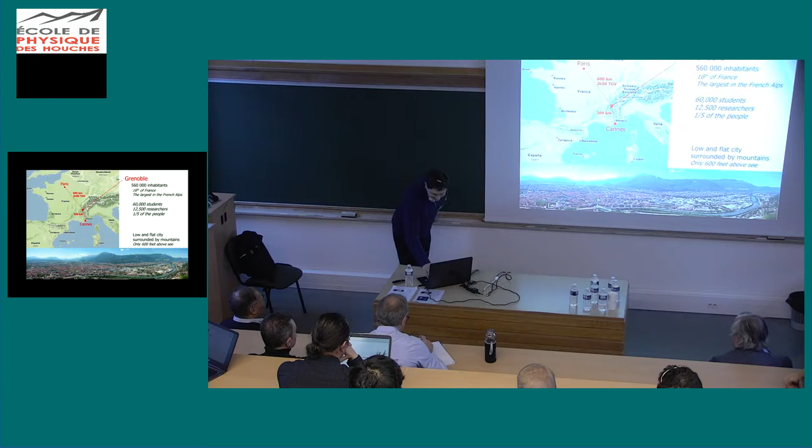Also, Grenoble is known as the flattest city in France. That's a bit strange, but the city was completely flattened by the glacier that surrounded the city 10,000 years ago. The weather is not so cold because it is only 600 feet above the sea, so it's quite pleasant to live. And Grenoble is known for winter sports, hiking, but also for several very big facilities like the synchrotron and ILL, Institut Laue-Langevin.

So I am working in the 3SR lab, the Soil Solid Structure and Risk laboratory, and we belong to the Risk and Vulnerability Division. One of its aims is to investigate the behavior of materials and structures under extreme loading conditions. Among our facilities you can find the GigaPress, a very big triaxial test press for concrete. You can perform experiments on 70 millimeter diameter concrete samples up to 1 gigapascal hydrostatic pressure. The capacity of the press, if I remember, is 13 meganewton.

But also we can perform dynamic experiments, Hopkinson bar experiments for spalling, for shearing. We are also developing experiments at the structural scale on the DESIS platform. You can see here a beam that was supporting a very huge weight. In this test, we simulate the loss of the bearing capacity of the central column. That's why it is completely bent; this is the final state of the beam. The lower support was released in a few hundreds of milliseconds, so we were able to simulate this loss of bearing capacity, and we record the process with ultra-high-speed imaging, etc.

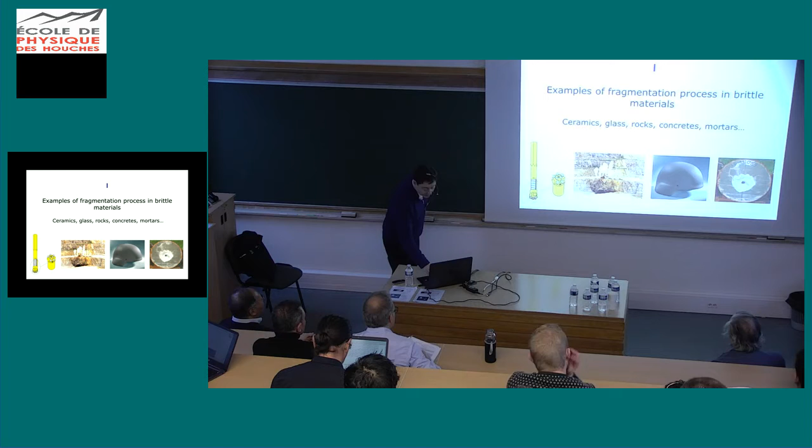So, a few examples. We have already mentioned these examples, so I will be fast in this part. If you have any questions during the discussion, you are welcome. So I have already mentioned the intense fragmentation process that can occur during impact experiments.

And this is very important to understand the behavior and the ballistic performances of material like ceramics used in helmets, vehicle protections or body armor.

But I want to stress that fragmentation process is not only observed under impact loading, it can be observed in a quasi-static test. And for instance, this is a uniaxial compression test performed more than 10 years ago. It was my master project, so it was quite a long time ago. And you can see the very nice experiment we performed with Christophe Denoual.

So it consists in compressing in quasi-static, so the loading is a few minutes long, a sample that is a Diabolo sample, as you can see. And we can reach up to 6 gigapascal of axial stress in this part of the sample, the ligament of the sample. But what happened in a few microseconds, it is a brittle failure.

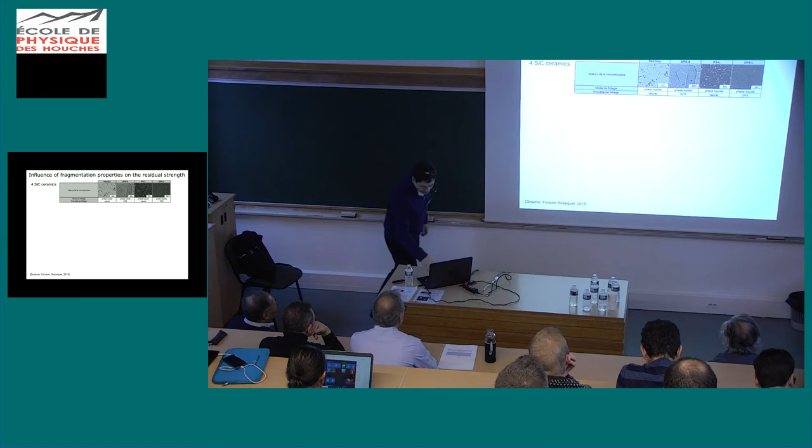So why should we investigate fragmentation? Maybe we could say, okay, the ceramic fragments and we don't care how it fragments. But in fact, it is important, and this is, I think, the configuration that can explain that to you. In this configuration that was presented by Marielle yesterday,

ceramic that was sandwiched between a front steel plate and aluminum backing was first impacted with a cylindrical projectile, so we generate an intense fragmentation process you can see here. And after, it was re-impacted with a conical projectile, as you can see.

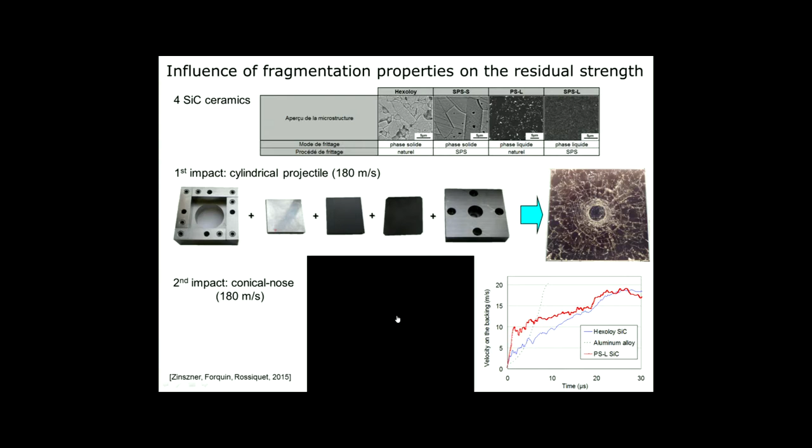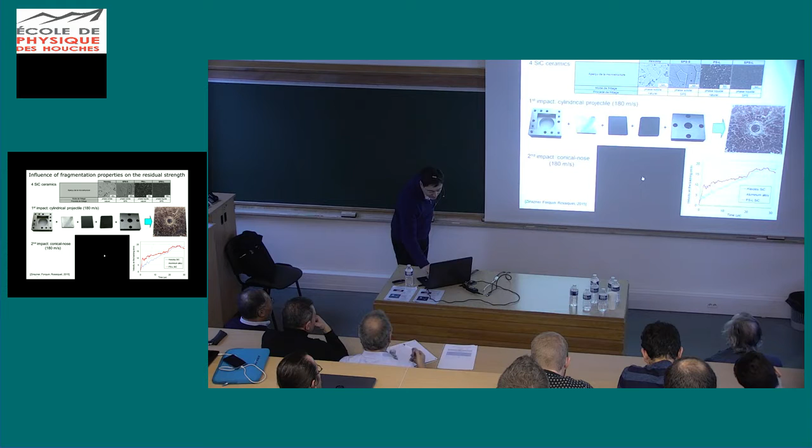And what was observed since the Zinszner PhD work was that the velocity profile was strongly different depending on the fragment size in the ceramic target. So there is a relationship between fragment size and the penetration resistance of the fragmented medium. That's why we need to analyze and better understand the fragmentation properties of this kind of material.

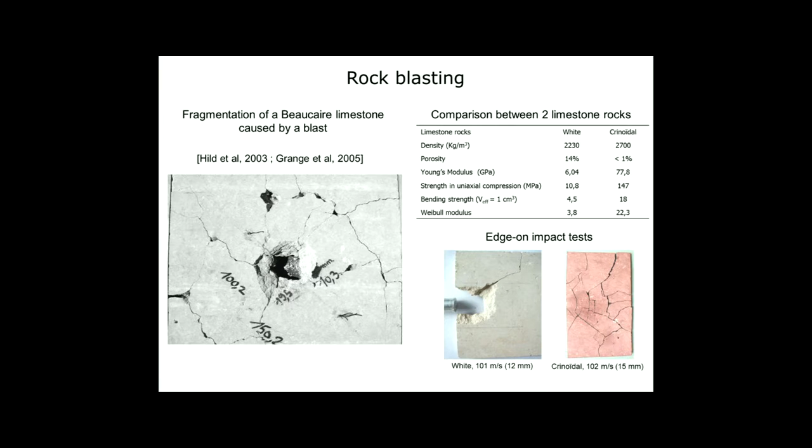Okay, other examples, but I will be fast. Rock blasting. In this example, what was interesting is that the people from a company called Nitrochimie, a French company, were not able to fragment a weak rock. When I say weak rock, this is a white rock with quite low strength in compression, only 10 megapascals, and with quite low bending strength, about 4.5 megapascals. Whereas they were much more confident fragmenting a very hard rock like a crinoidal rock.

And the explanation was given from these edge-on impact experiments. So you can see, in fact, it was demonstrated that in the weak rock, the compression damage completely absorbs the kinetic energy. And that's why it was so difficult to generate new cracks in the rest of the volume. Whereas in the crinoidal rock, it was much easier to let the cracks propagate.

Okay, I hope it's not too heavy.

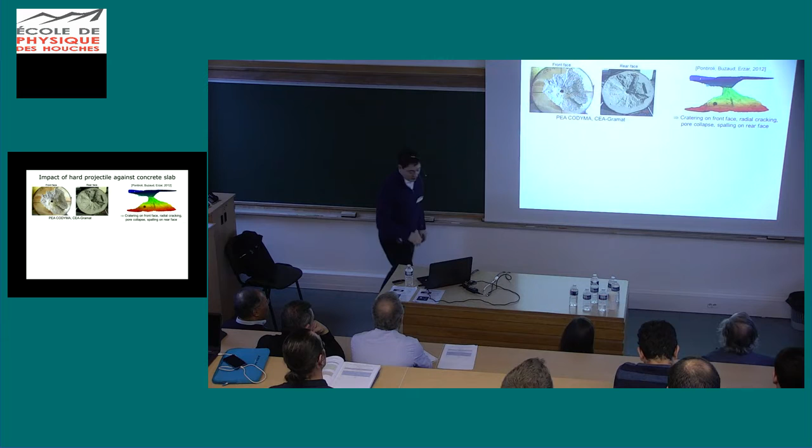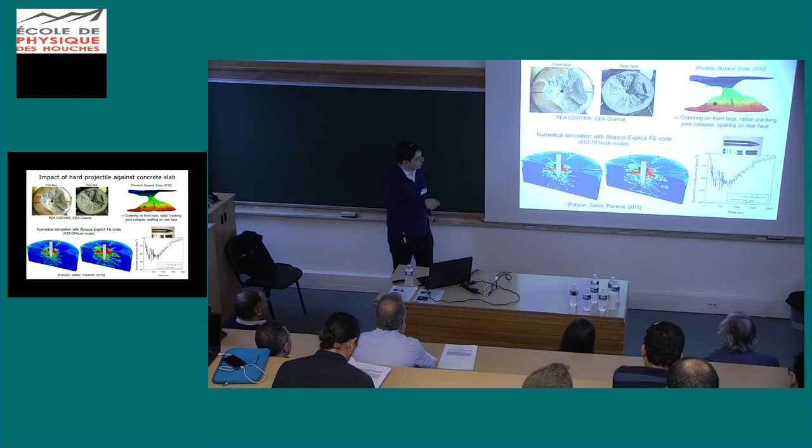Okay, it's okay. Of course, another example could be the ballistic impact, the impact of a kinetic penetrator against concrete targets. And again, we can observe a large amount of fracture, of tensile damage that has to be taken into account in a numerical simulation. Okay, this is also another example.

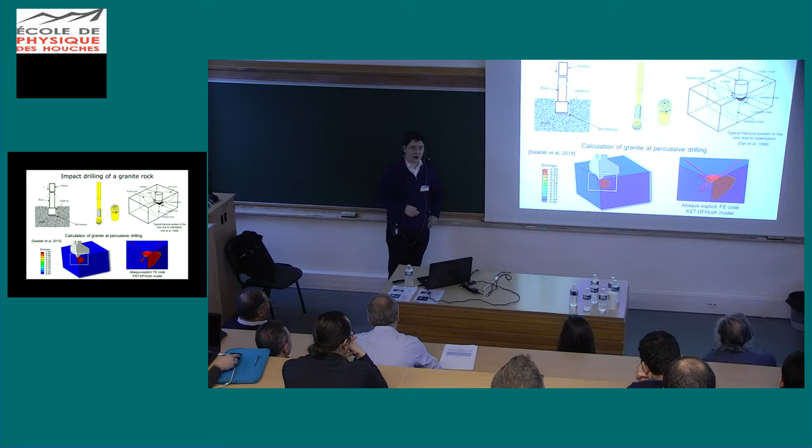And in fact, to optimize this process, we have to optimize the size of defects, the size of fragments, because all the fragments should be evacuated on the lateral part of the tool. So it's very important to have no too-large fragments, but not too-small fragments either. So that's why fragmentation properties are also very important in such applications.

Okay, so now a few experimental results to show you the influence of strain rate on the fragmentation of these materials. So how to perform a quasi-static test? In fact, the simplest way to perform a quasi-static test is to do a bending test. All of you know this kind of test. These tests were performed in the present case on ultra-high strength concrete.

And what is interesting is to see that the failure load or the failure stress is random. And it is not random due to the change of sample dimension. It is random due to defects. You can see, for instance, the B5 sample, where the tensile surface was here at the top, and you can see the large pore near the tensile surface, whereas in B1, a much smaller pore triggered the failure. So there is an obvious correlation between the size of critical defects and the corresponding failure stress.

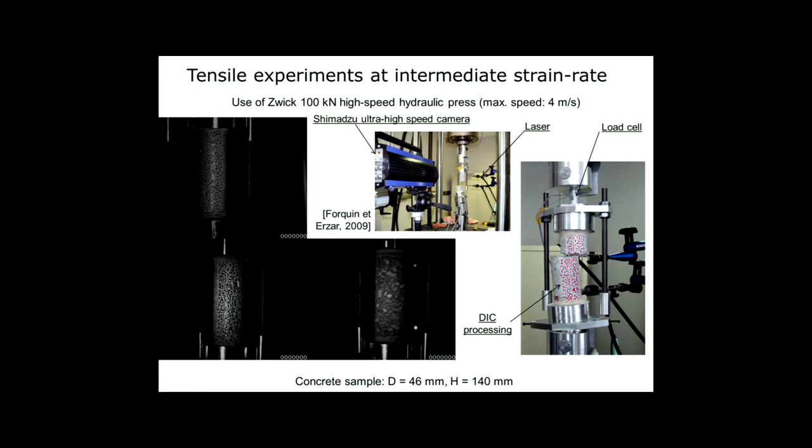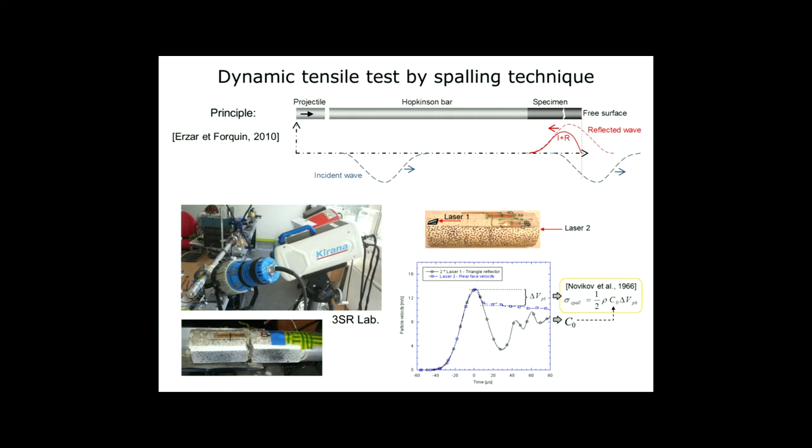But we can also perform direct tensile tests. It's less convenient because you have to glue the sample, so you can have a triggering of fracture near the sample ends. But okay, I will be fast. Another way to do it is, of course, to use the spalling technique, but this is now a dynamic test. This test was already commented on. I would just say that the typical strain rate that can be obtained is from 20 to 200 s⁻¹. And you can use nice instrumentation with an ultra-high-speed camera to perform a full-field measurement.

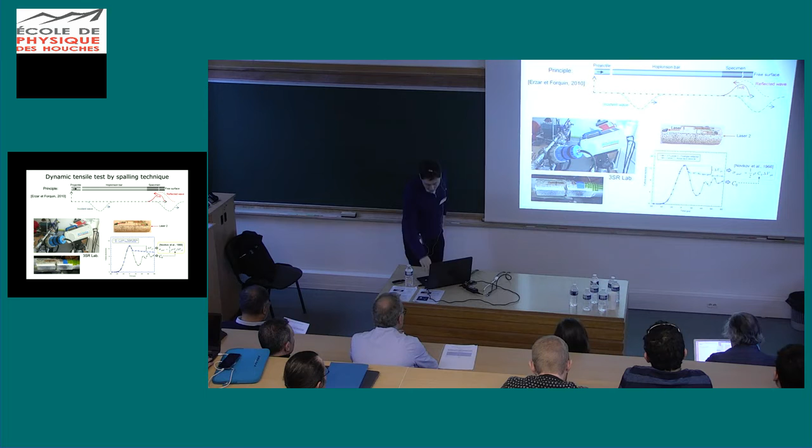And Dominic and I are working on this kind of test to derive displacement fields, and from the displacement field we are able to get the acceleration field in the sample. So we are able to recalculate the exact level of stress in any cross-section visualized with the ultra-speed camera. And that's a method to measure the tensile strength or the spall strength. Or another method, of course, is to use the classical Novikov formula that relies on the use of an interferometer.

Okay, but what is important here are the results. And the results show that in quasi-static, the failure stress is about 4 megapascal. At intermediate strain rate above 1 second minus 1, we have just a little increase of strength, from 4 to 5, 6 megapascal. Whereas above a certain strain rate, we have a sharp increase of strength.

And what was also very interesting to see is the influence of humidity. So, for instance, you can see here a wet concrete, the blue diamond. The green triangle corresponds to wet microconcrete. So the same strength is observed, so there is no big influence of aggregate size, it seems. Whereas a much lower strength can be observed with dry concrete or dry microconcrete. Okay, so this is an important point.

And the second important point is the amount of cracks that now is observed. You can see in this microconcrete loaded at 130 second minus 1 the numerous cracks that were supposedly triggered on defects, on pores, and propagate dynamically in the whole sample.

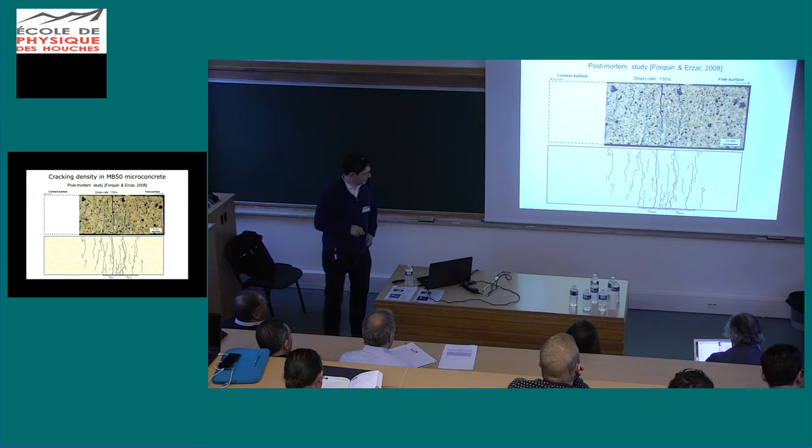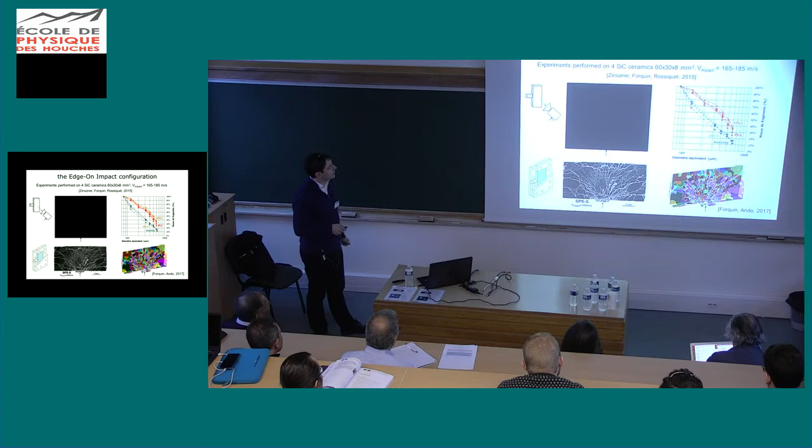And what is important is to observe that, first, the fragmentation process is a deterministic process. That is, two samples of the same ceramic grade will lead to the same fragment size distribution. It's, I think, very clear here. But when you compare different ceramic grades, you can observe different fragment size distributions. So there is a strong influence of ceramic microstructure on the fragmentation process and fragment size distribution.

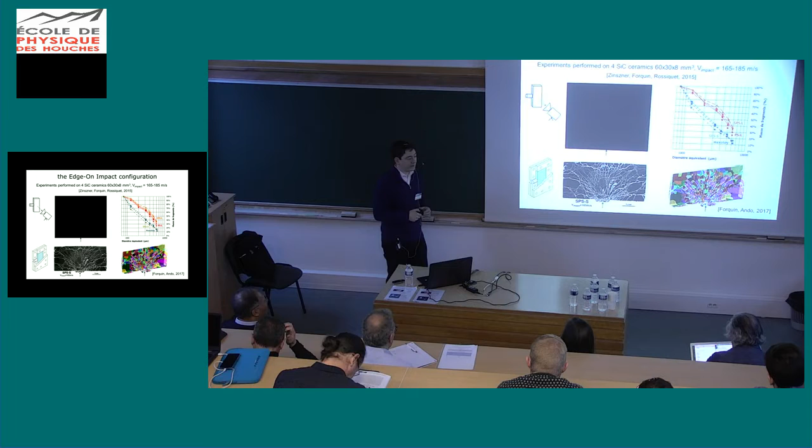And to analyze this fragmentation process, we can perform edge-on-impact experiments in what we call the sarcophagus configuration. As you can see here, it's a post-test view of damage, and we can also analyze with X-ray tomography all the fragment distribution in the target. So we can correlate the applied strain rate at different locations with the fragment size. That is also very interesting.

Okay, but we are not measuring any strength with the edge-on-impact experiment. So how to measure strength? I could say one of the most beautiful ways to do it at high strain rate is to use the GEPI testing facility available at CEA, the French Atomic Agency, in Gramat. I have already commented on this kind of test, but I just want to say that with these experiments you can apply strain rates in the range from a few thousand second minus 1 to a few tens of thousand second minus 1.

And what was observed by Erzar and Buzaud was that, first, the strength seems to be equal to the quasi-static strength of the ceramic, that is well known. But above a certain strain rate, we have a sharp increase of strength. And so we have a transition between, let's say, a non-dependent strain rate regime and a highly dependent strain rate regime.

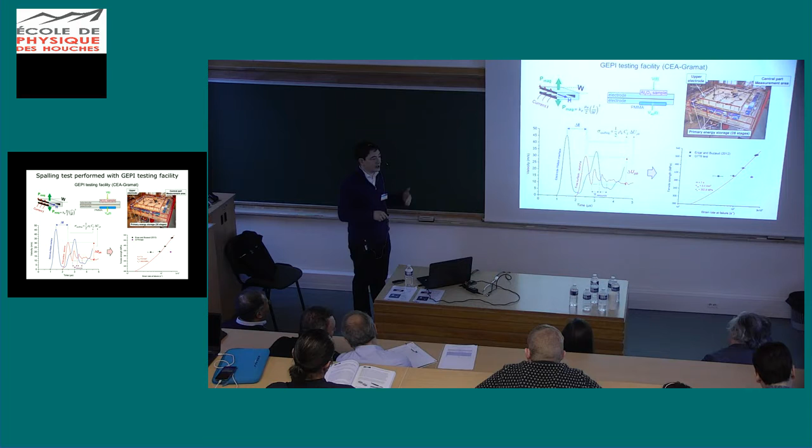Also, what was interesting to observe is that this point corresponds to a test performed with a compression stress above what we call the Hugoniot elastic limit, so the elastic limit in uniaxial strain of the material. So you can observe that now the strength is much lower. So there is a possible coupling between compression damage and tensile damage. So it's important to prevent compression damage if you want to characterize the tensile damage of the virgin material. Okay, this is just a remark.

So to conclude this part, several techniques can be used for quasi-static experiments, like direct tensile test, bending, Brazilian test, etc. The main result is that failure stresses are random. Single fragmentation occurs in quasi-static, a size effect is observed, and we can also observe with brittle materials that the fracture energy is low.

Under dynamic experiments, Hopkinson bar can be used in this range, and other techniques are needed above 1000 s⁻¹. Edge-on impact tests can also be performed to visualize damage.

And finally, we observe multiple fragmentation, high density of cracking, strong increase of strength with strain rate, and a strong influence of free water in concrete, or maybe also in rocks, because rocks could also be saturated with water. Short time to damage, according to the ultra-high-speed imaging, and a deterministic distribution of fragments is observed, with a strong influence of material microstructure.

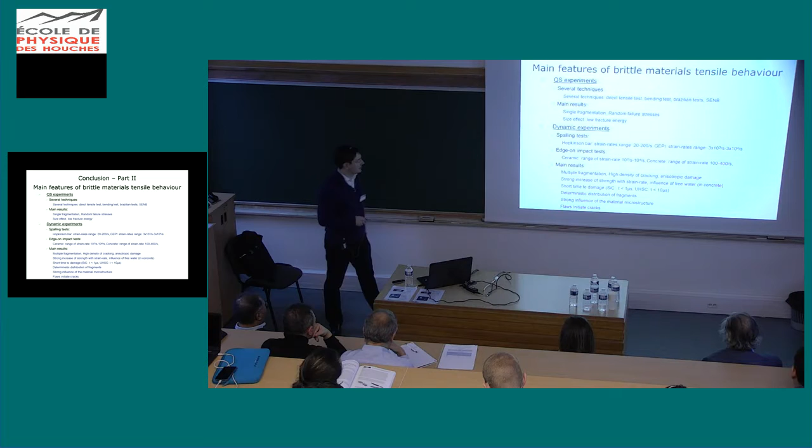So is there any common point between quasi-static and dynamic fragmentation? Yes, the only common point would be the flaws, because we can suppose that cracks are all initiated on flaws, and maybe on the same flaw population, but we will talk about that later.

Okay, so now let's go to the modeling part. So how to model a single fragmentation process? I recommend, for instance, the Weibull model. So I will remind you of the basis of a Weibull model. Imagine you perform a series of bending experiments applied to a brittle material like silicon carbide ceramic.

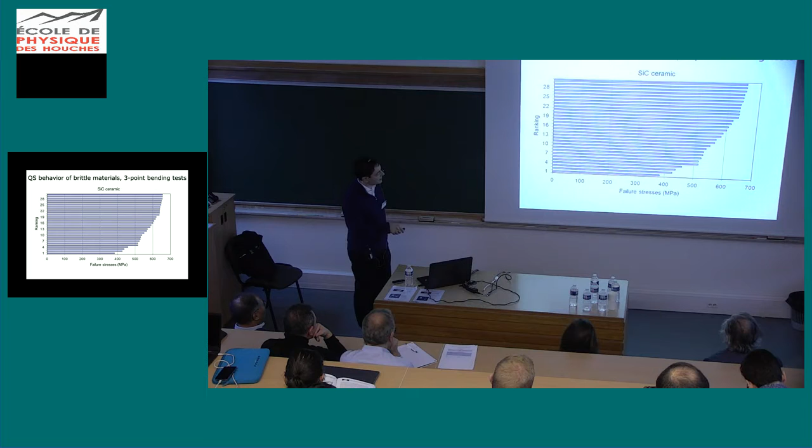So what we will observe is random failure stresses, and you can see the failure stresses obtained with these ceramics, ranging from about 400 megapascals to more than 650 megapascals. So you can fit a law that is called the Weibull law, which was published by Weibull in 1939.

And as you can see, this function fits this failure probability, this stress distribution, very well, and it is 1 minus exponential of minus the applied stress sigma over sigma 0, which is just a constant, to the power m. And m corresponds to the Weibull modulus, and the Weibull modulus means the scatter in the failure stresses.

For instance, if you consider a high Weibull modulus, you will have a curve that goes up very fast, whereas if you consider a low Weibull modulus, the failure stresses are spread out over a large range of stresses. So m means scatter in the failure stresses: the higher the m, the lower the scatter; the lower the m, the higher the scatter of failure stresses.

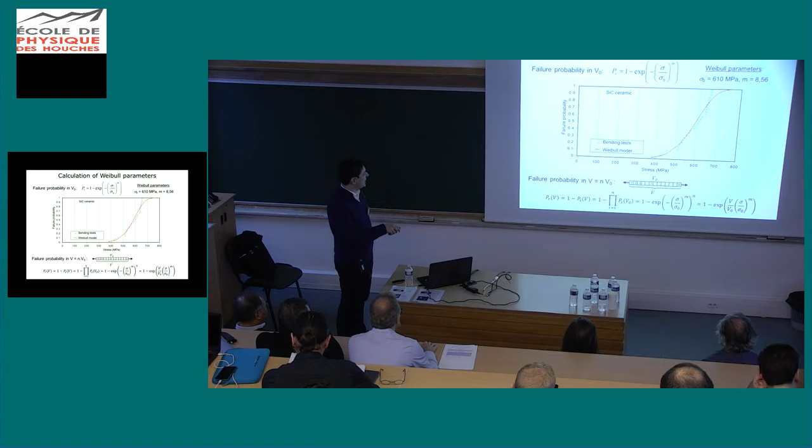Okay, this is very simple at the beginning, but it is valid for one volume. If you change the volume, we would like to know if the probability law is the same. Of course, it is not. Why? Let's consider a volume that is n times bigger than V0. So what would be the failure probability? The failure probability would be 1 minus the probability of survival.

And in fact, the probability of survival of a chain, as you probably know, is the product of the survival probability of each link that composes the chain. If only one link is broken, the whole chain is broken. So it's the product of the survival probability of each of these elements. And that's why if you use this probability of survival, which is exponential of minus sigma over sigma 0 to the power m, as you make the product of the same thing, it is to the power n.

But as you know, the exponential to the power n is the exponential of the sum. If you do exponential of a times exponential of b, it's equal to exponential of a plus b. So in fact, the n goes inside this part of the equation, and what is n? It is V over V0. So now you can get the failure probability of the volume V, knowing the failure probability and the failure parameters of the volume V0.

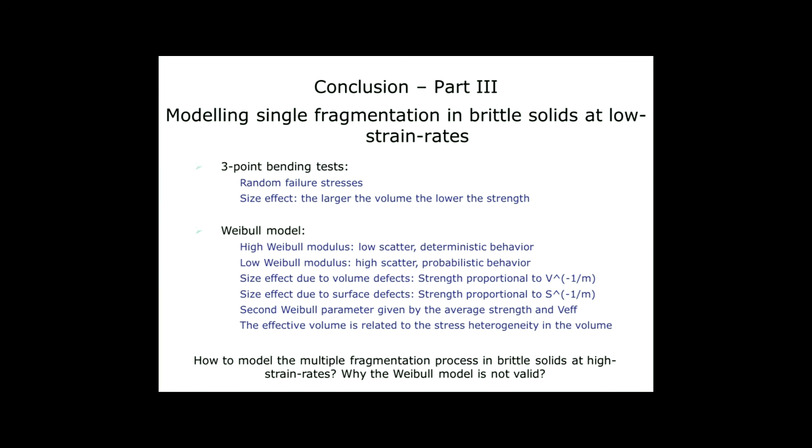Yes. So you can see that according to bending tests, failure stresses are random. Size effect is expected in quasi-static. The Weibull modulus indicates the scatter in the results. With a high Weibull modulus, you should have a deterministic behavior. Also, the predicted size effect is the following: it should be proportional to the volume to the power minus 1 over m. So it's a prediction of the model that is very interesting because m was provided by one set of experiments.

In case of surface defects, the Weibull model predicts a strength proportional to the surface to the power minus 1 over m. A second Weibull parameter is provided from the average strength and the effective volume that depends on the Weibull modulus that is known.

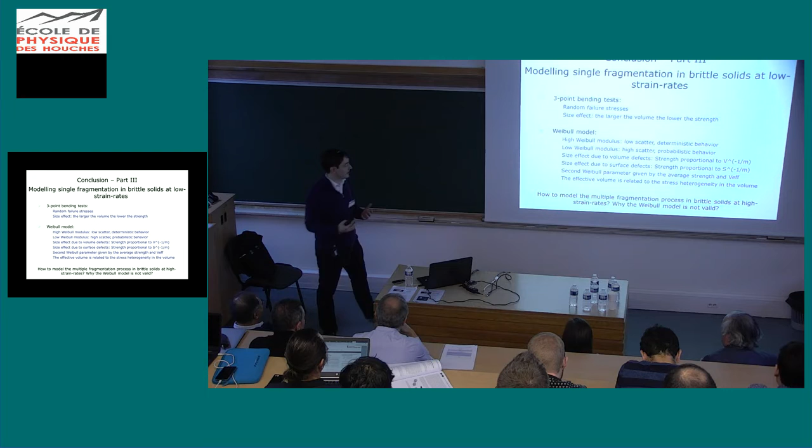Okay, so now why is this nice theory not valid at high strain rate? That's a question, and above which strain rate. So that's what I want to explain to you. So the modeling of the multiple fragmentation process. Let's consider a ring like that, and let's apply a radial velocity on the internal surface of this ring. So you can understand that the strain rate is constant if we consider a constant applied velocity, and it's about V0 over the radius.

Okay, so to simulate a fragmentation process, we need a failure criterion. So let's consider a Weibull distribution of failure stresses in each element that composes this ring. You can see all these colors and the corresponding failure stress in these elements. When the failure stress is reached, the element is broken immediately. And what can be observed is at low strain rate, 10 second minus 1, a single fragmentation process occurs. n equal 1, or sometimes we have two failures, but it is at 10 second minus 1.

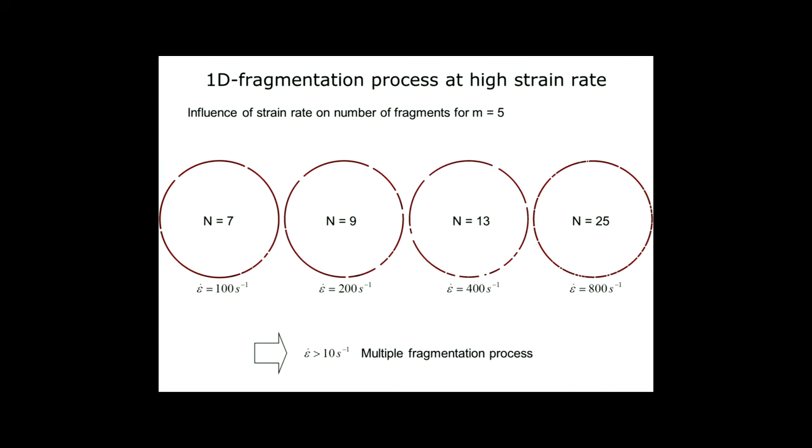Let's increase the level of initial velocity, so the level of strain rate in the ring. At 100 second minus 1, now you have 7 fragments. At 200 second minus 1, 9 fragments, etc. At 800 second minus 1, you have 25 fragments. So you have an increase of the number of fragments with the strain rate, contrary to quasi-static loading. So why do we have multiple fragmentation above 10 second minus 1?

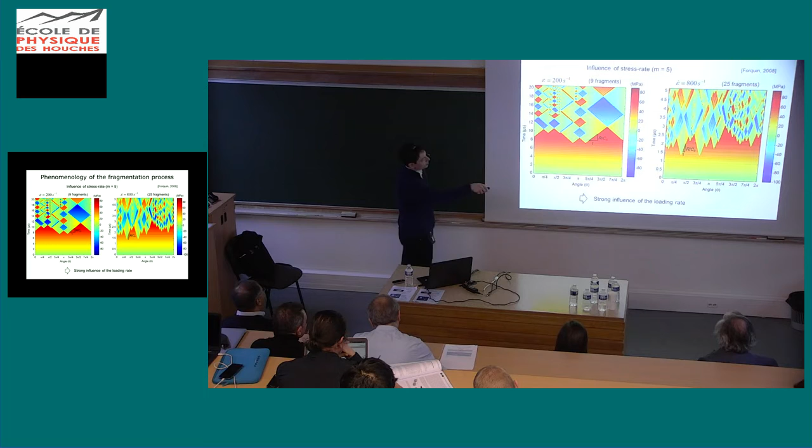If you close the cones, of course, you will obscure less. If you obscure less, you will have more fragments, more critical defects activated. At the inverse, if you open the cones at low strain rate, what does it mean? It means that you will obscure more, so you will prevent much more initiation of critical defects. And this explains the influence of strain rate on the fragmentation process.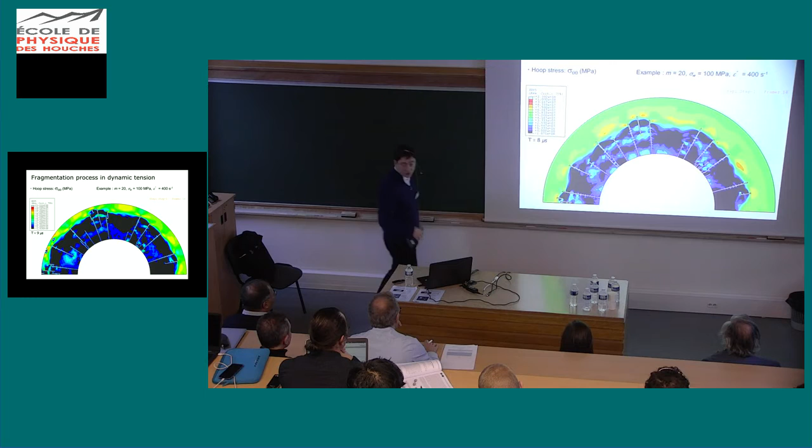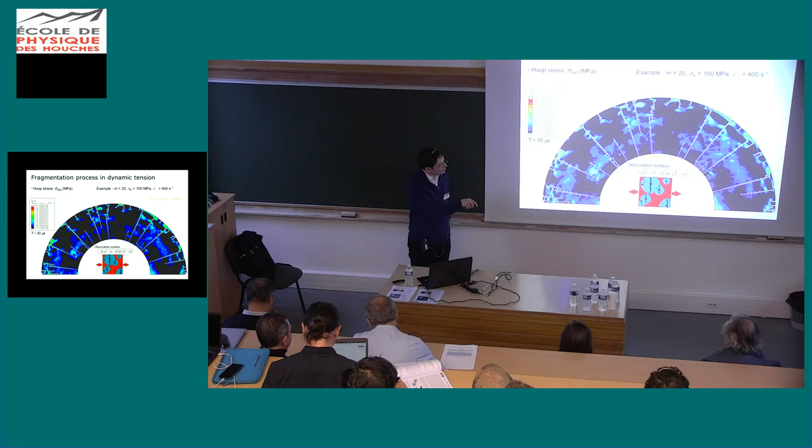So what does it mean? It means it's possible to extend this modeling to 2D and 3D fragmentation processes, considering a size of obscuration volume that is a shape factor times the radius of the crack, and the radius of the crack being the crack speed times the current time minus the time at crack inception.

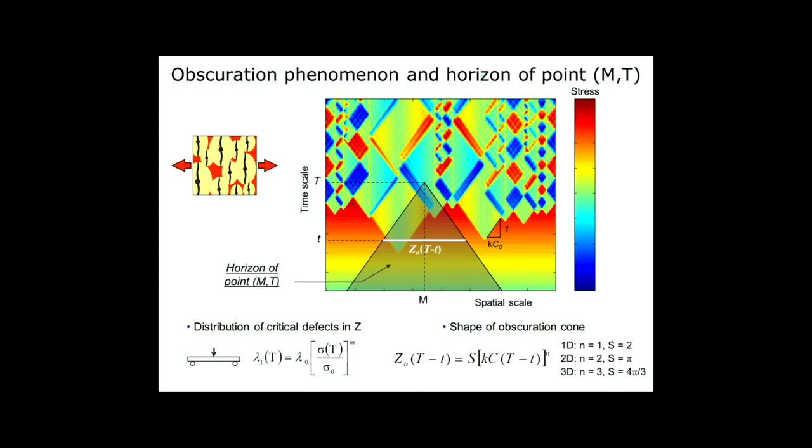So now, how to model the fragmentation process? What do we need to model the fragmentation? First, we need a distribution of critical defects, of course, that can be assumed or not as a power law function of the applied stress. We need also a law to model the growth of the obscuration zone. And here the main parameters will be the shape factor, but also the crack speed. That is also an assumption.

And now the question is, what is the condition at a point M at a time t to be non-obscured? And you will agree with me that the answer is quite easy. The answer is there is no critical defect that exists in what we call the horizon of point M at time t. So what is the horizon? It is the inverted cone you can see here. So if there is no critical defect in the past, in the history represented by this inverted cone, nothing will obscure this point. Here you have two defects that are obscuring this point.

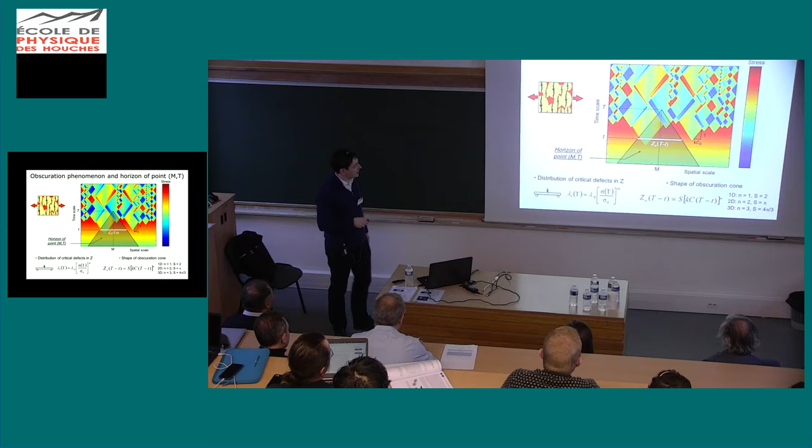So how to express this with mathematics? We will use the same mathematics as in the Weibull model, in fact. You remember the weakest link hypothesis that says that the probability of survival of a whole volume is the product of the survival probability of each element that composes the volume. Now we will say the non-obscuration probability is the product of the probability of no crack inception in each space-time volume, so four-dimensional volume, that composes this horizon of point M at time t.

And how to express the probability of no crack inception in this dV dt volume? Of course, we will use the same law as the previous one. So here, the probability of no crack inception in dV dt is exponential minus not n, as in the first Weibull equation, but minus the increment of the number of critical defects. And the increment of the number of critical defects is the derivative of the cracking density by dV and dt.

And now we can get the probability of obscuration, that is 1 minus the probability of non-obscuration, and that is 1 minus exponential of this integral, that is a time integral, but you can recognize the two parameters that are the density of critical defects and the obscuration volume that depends on the crack speed.

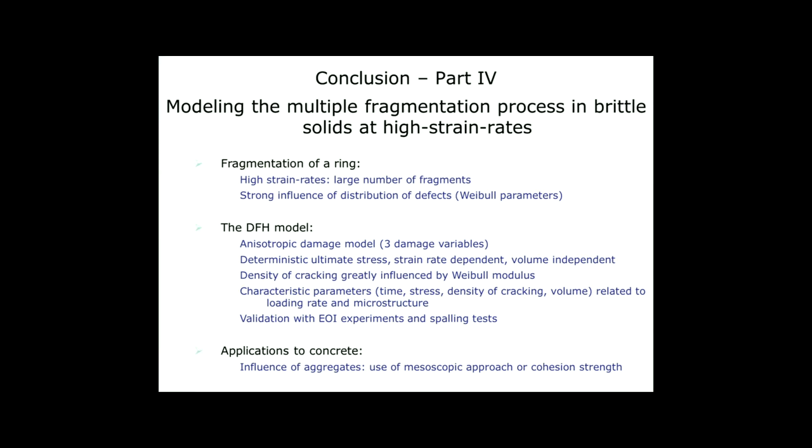You can extend the damage model. So you can assimilate damage as the probability of obscuration, and assuming this function of the critical defect, you can model single fragmentation at low strain rate, that is probabilistic and strain rate independent, and at high strain rate, an increase of strength with the strain rate. Okay, so I go fast on this. I will skip this, because maybe I am a bit late.

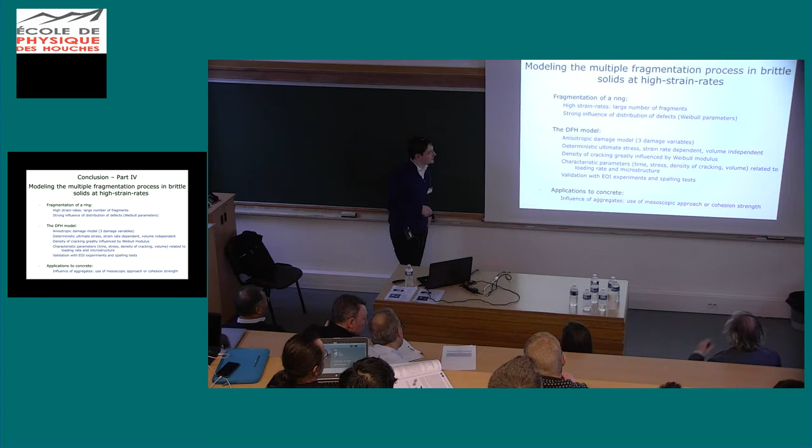To conclude with this part, with the DFH model, so you understand it's an anisotropic damage model that predicts the strength increase with strain rate and the cracking density given the applied strain rate. Okay, we have performed several validations. I have been talking about that previously, so I will go fast.

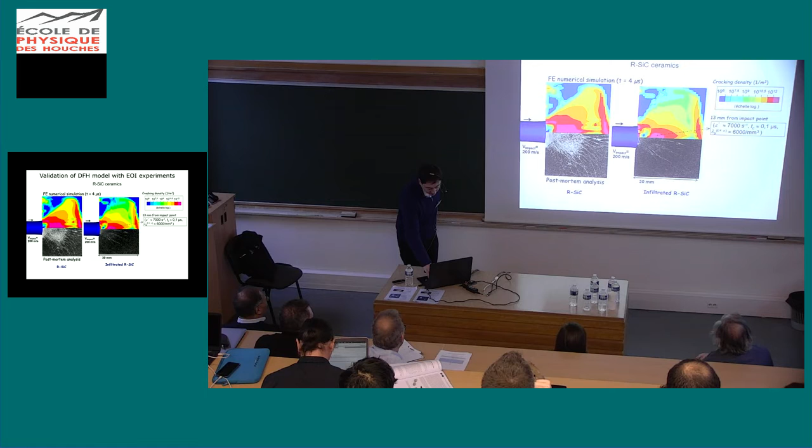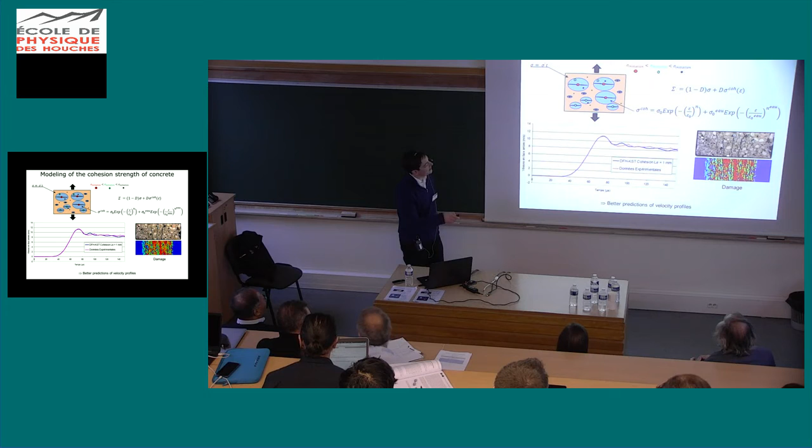Okay, so there are several limitations. The main limitations are, of course, related to the assumption that we use a power law function of the applied stress for the critical cracking density, and we assume a constant crack velocity. And we neglect microinertia at the micro scale, but I won't go into these details.

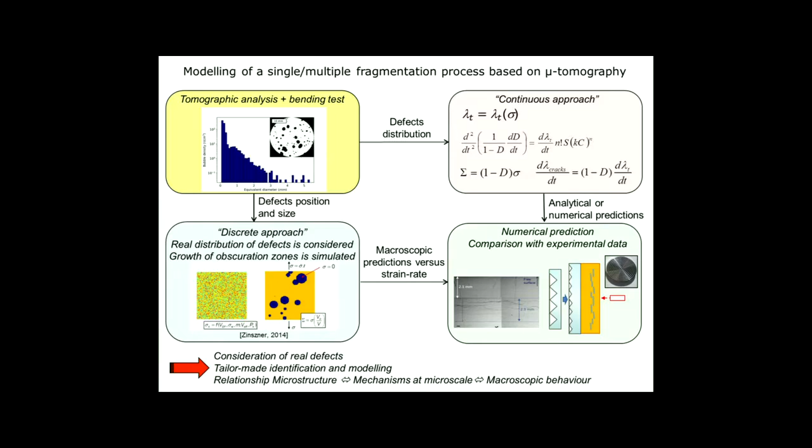Okay, so let's go to the last part. It is how to use microtomography to model the fragmentation process. My co-authors will present two methods to do it. One is the continuous approach, so thanks to microtomography and to information on defects, we will consider a new type of critical defect law, that is a continuous law. And we will use the same damage evolution law that is a function of this critical defect law. And you will see the result in terms of ultimate strength and cracking density.

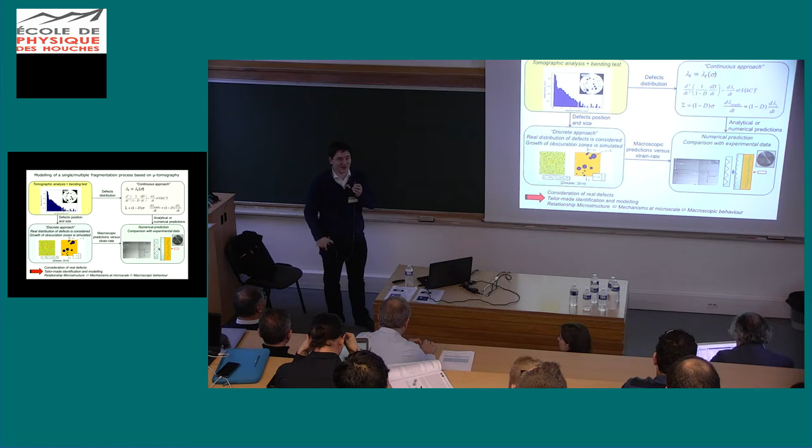And the second approach is what we call the discrete approach. In this approach, we are drawing lots of failure stresses, but we can consider the exact defect distribution that is provided by the tomographic analysis. We make obscuration zones grow around the critical defects characterized from tomographic analysis, so we are able to get the obscuration zones and their growth numerically. And after, it's possible to get the same kind of results, the ultimate strength and the density of cracks. Okay, so I let Maria continue, presenting the results with ultra-high performance concrete.

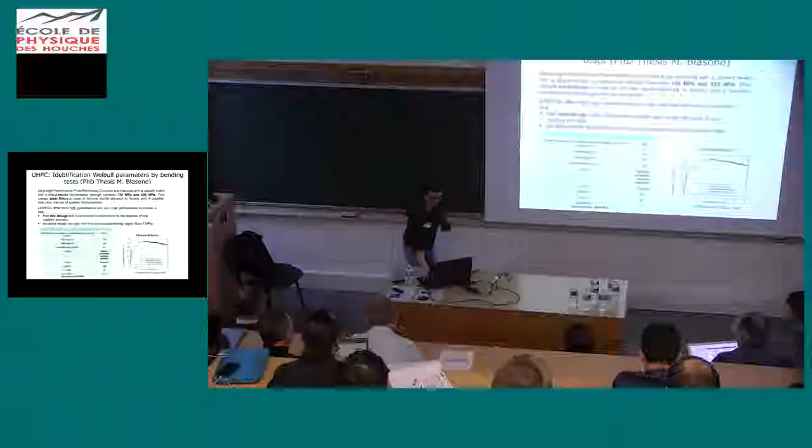So now we will see an application of the model that Pascal explained. First, let me say a few words about my concrete, just to understand what we are talking about. So I'm studying the dynamic behavior of ultra-performance concrete. That is a concrete with a very high compressive strength. We are between 150 megapascal and 250 megapascal.

This is possible thanks to a very complex mix design that leads to a very low porosity and a very low water content. So we are at a water to cement ratio of less than 0.2, and we don't have big particles because the maximum is 0.5 millimeter. The maximum grain size is sand. And also in this ultra-performance concrete, usually in the mix we have fiber.

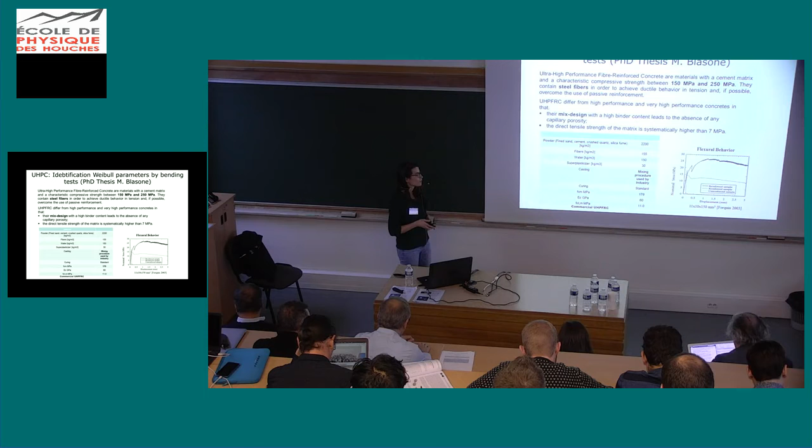But we will see an application where in the model we do not assume there are fibers. The reason is that if we see the results we have in the bending test, we have the same peak strength for the concrete with and without the fiber, because the fibers have an effect just on the post-peak behavior. For this example, I'm using ultra-performance concrete with a compressive strength of 170 megapascal and a quasi-static tensile strength of 11 megapascal.

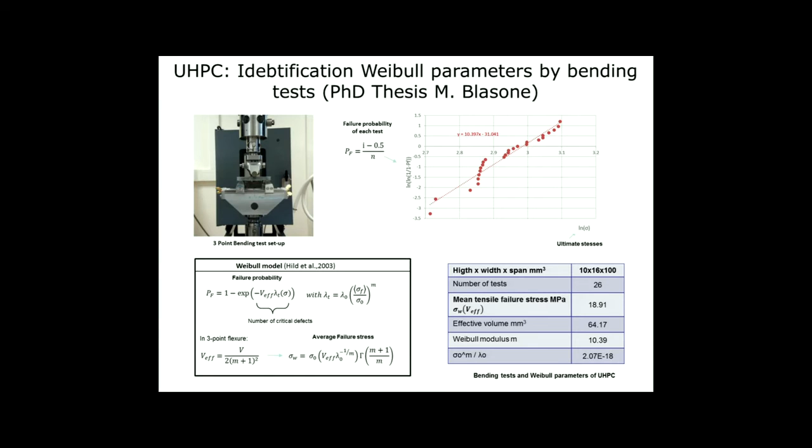So first, we start with a bending test, and we try to find the Weibull parameters. What we have to do is just perform a number of bending tests. Here we have the result of 26 bending tests. And then we assign to each tensile strength the failure probability. We just have to rank all the tensile strengths. And here we have the formula for the failure probability of each test.

And then we plot in a logarithmic graph the logarithm of the ultimate tensile strength against the logarithm of the logarithm of 1 over 1 minus the probability of failure. Our points are aligned along a line, and so we get the power law function that gives us the Weibull modulus, that is the slope of our line. Then we can associate the mean strength we get with the effective volume of the bending test. This is very usual. And so we get also the scale parameter. Now we have our Weibull modulus, which gives us the scatter of the tensile strength, and the scale parameter.

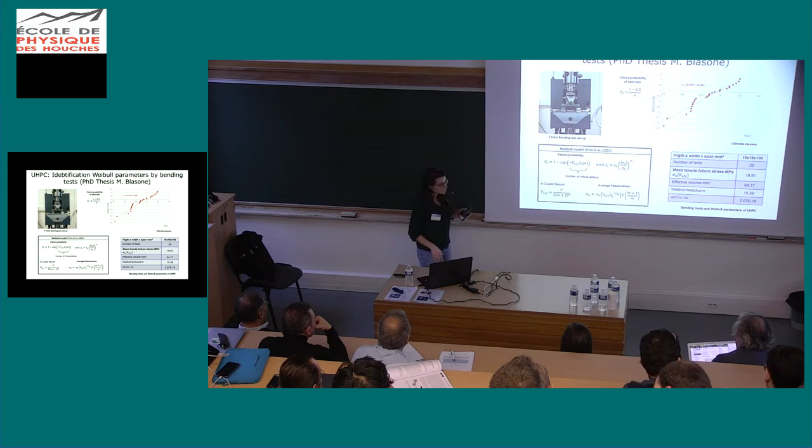Then we pass to the microstructure of the concrete. We make an X-ray tomography scan of our sample of 50 millimeter in diameter and 100 millimeter high. How does an X-ray scan work, very fast? We have an X-ray source, a detector, and a rotating stage. Our sample is placed on the rotating stage, and we need to take radiographs over all 360 degrees to get the 3D reconstruction.

So at the end, what we get is a matrix of gray values that is directly proportional to the density of our material. In our reconstruction, the pores are black because they are low density, the matrix is gray, and the fibers are white because they're very high density. Then, using a simple gray value threshold, we can extract our porosity. We have a binarized image, and I assume that to identify a pore, we need 5 pixels in diameter. This is because if we scan the same volume with different resolutions, I observe that using 5 pixels, my populations of defects completely overlap.

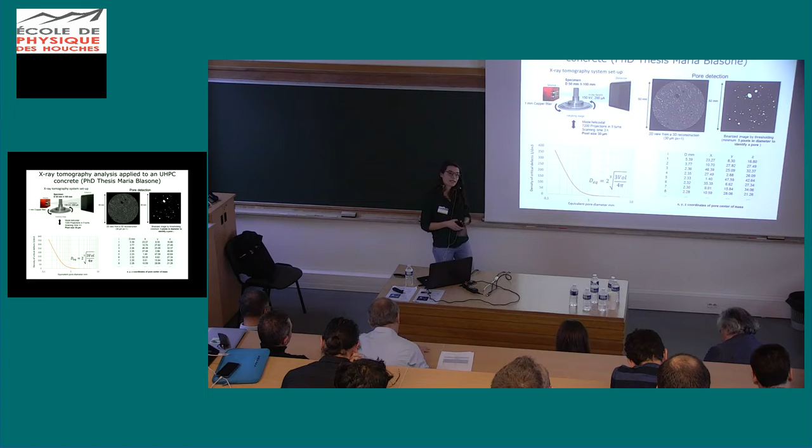Then, with image analysis of our pore distribution, we can extract each pore, its equivalent diameter assuming that the pores are spheres, and the coordinates of the center of mass of each pore. Then we can plot the equivalent pore diameter against the density of critical defects. Of course, the density of critical defects is a cumulative density, so as the size of the pore decreases, the density of critical defects increases.

Then we want to assign to each pore a strength of crack initiation. To do that, we go to linear fracture mechanics and take the basic formula that links the crack length with the stress intensity factor, and we assume that two times the crack length is exactly the pore diameter. The only unknown parameter in this formula is the shape factor, which gives us the shape of our pore, how the crack is.

So we don't know this parameter, but what we want to do is just to use the Weibull law to find this shape factor. So what we can do easily is just to plot this function that expresses the tensile stress failure as a function of the equivalent diameter for different values. We have 0.7, 1.1, and 1.97.

And then we can also plot for each value of tensile strength that is associated to each pore, the respective density of critical defects. And of course, the density of critical defects will be the total number of pores divided by the volume. So this curve is just the same curve that is shifted, changing just the scale parameter. And we will get as shape factor exactly the one that fits with the Weibull law, so with the test that we have done in quasi-static.

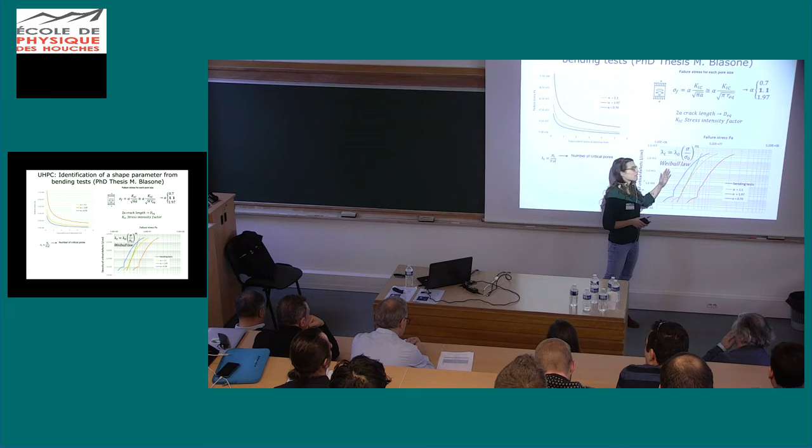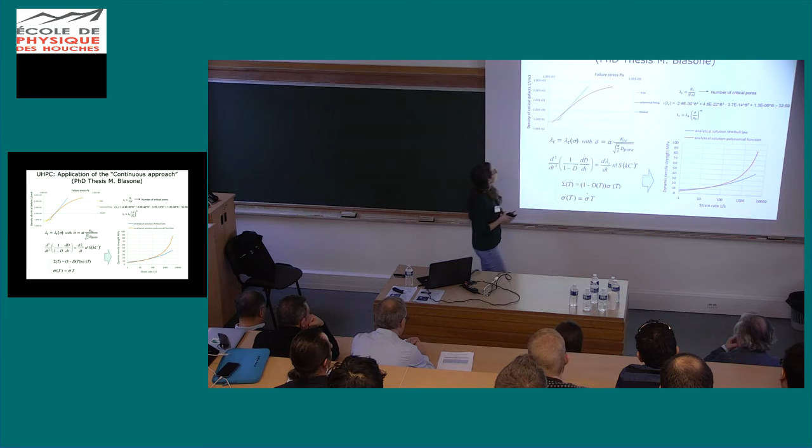Now we have in this graph the density of critical defects that we get using the quasi-static test, and the density of critical defects that we get directly from the scan. So what we can try to do is to extract a polynomial function that fits our population of critical defects extracted directly from the scan. And then we can try to use the model that Pascal has explained to extract a value of dynamic tensile strength for each strain rate.

So we have seen before the solution of the analytical formula. So assuming a constant strain rate, we have a value of dynamic tensile strength. So in this plot, we see what we get if we use the Weibull distribution of critical defects, and what we get if we use the density of critical defects extracted directly from the scan. So how this is done is very easy. Take the equation of the model. We just have to take this equation and integrate it two times to get the strength.

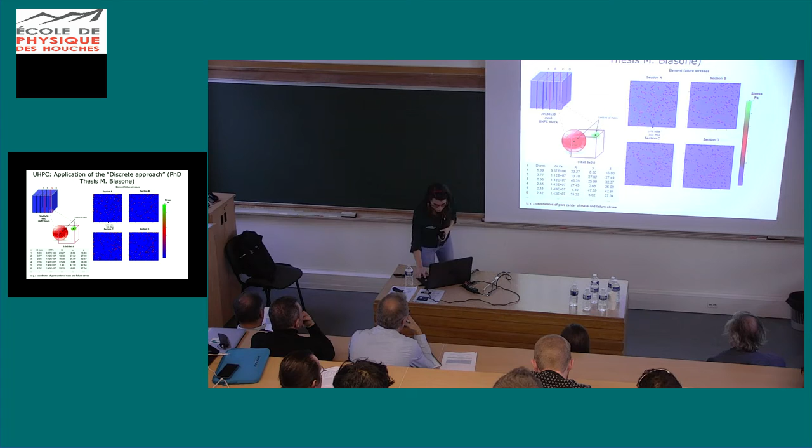So then what we do is just to apply a uniform tensile load with a constant strain rate. So in time we will have first an elastic behavior, then the fragmentation will start. What we observe here, just with this simple discrete model, is that for different strain rates we have a different fragmentation. Here I plot for one section the obscuration volume at the peak strength.

So we can see that for low strain rate just one pore initiates. As the strain rate increases, the number of pores that initiate gets bigger and bigger. And the velocity of propagation of this obscuration zone is constant. It is assumed to be proportional to the wave speed.

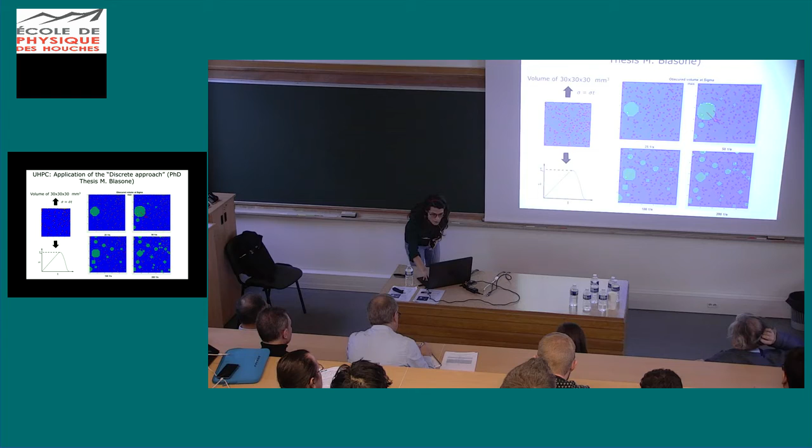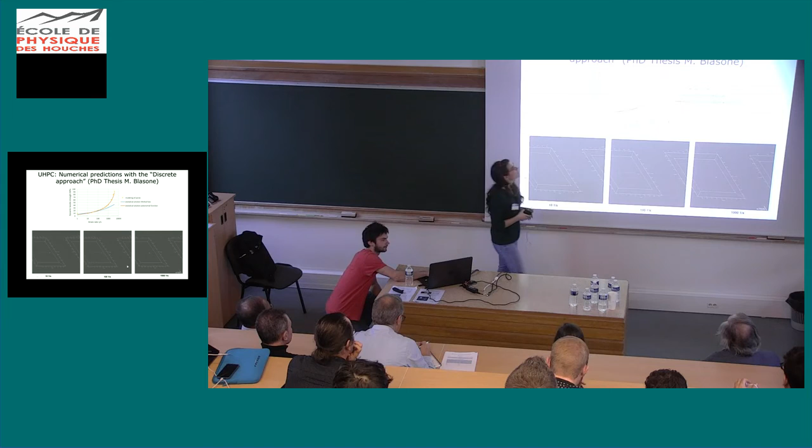So now we can plot together the graph that I showed before with just the analytical formula, and the values that we get from our discrete approach. And we can see that using the discrete approach, we overlap perfectly the analytical solution using the polynomial function. We can also remark that for low strain rate, these three approaches are perfectly the same, and they start to diverge at high strain rate.

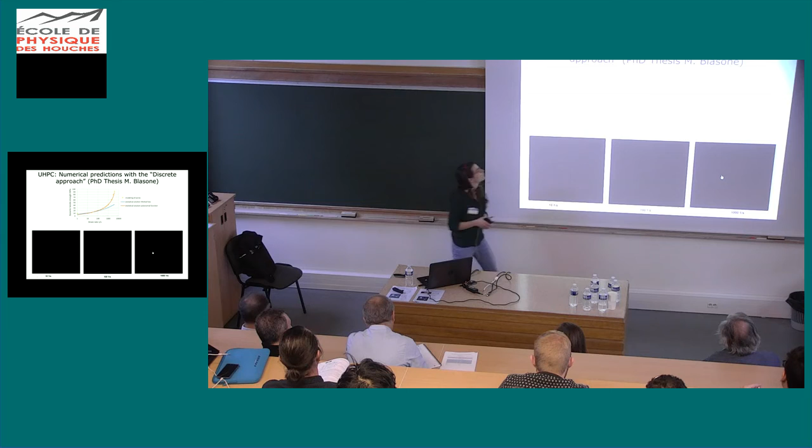And the reason is just one: we calibrate our model with the shape parameter from the bending test, which activates just the bigger pores. We could not go further here because we need a scan with higher resolution, because the last point that we observe is when we initiate all the pores.

So here we have some videos where we can see in time the obscuration zones that are increasing. So at low strain rate, just a few pores, and then as we increase the strain rate, we see an increased number of pores that initiate cracks. So now we will see the same application for ice.

Okay. So we're going to see exactly the same method, but on polycrystalline ice. We are going to use the same material as I presented yesterday, the highly porous ice. A quick reminder of the microstructural properties: we are dealing with an isotropic material with a homogeneous grain size, and the macroscopic porosity of this material is about 7 to 10%.

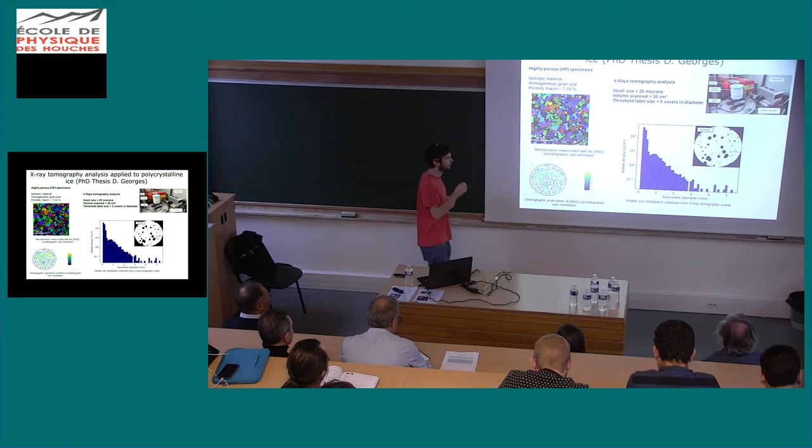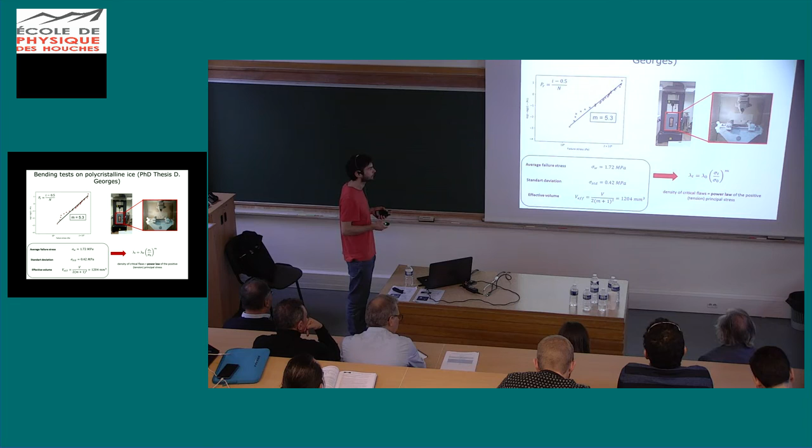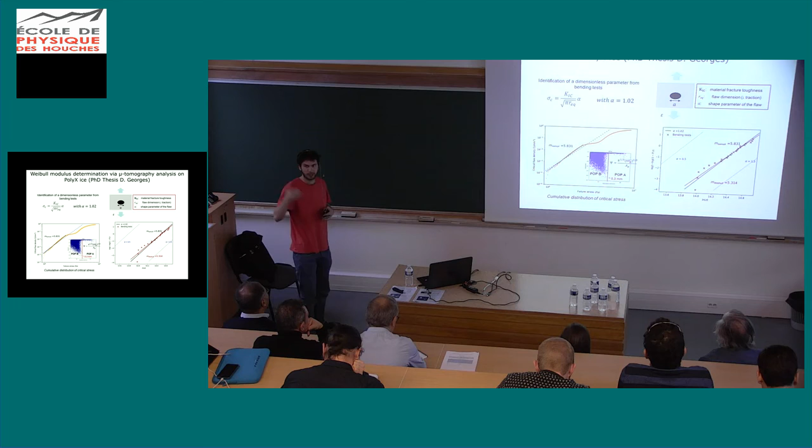With these two Weibull parameters, we could compute a critical flaw density that follows a power law of the positive principal stress. Also, as Maria said, it's possible to convert our bubble size distribution into a stress distribution by using linear elastic fracture mechanics theory. We are converting the bubble size into a critical stress of activation, and for a given stress, we can determine the potential density of critical flaws in our material. It's the yellow curve on this graph.

If we focus on the first part of this curve, we can see that the largest porosities seem to follow a power law. So it's possible to plot a pseudo Weibull modulus on these large porosities, and the value is about 5.8, very close to the value found during the bending test. It means that during this test, we actually solicited the largest porosities only. And that's why the shape parameter is very close to 1, because we are dealing with spherical porosities.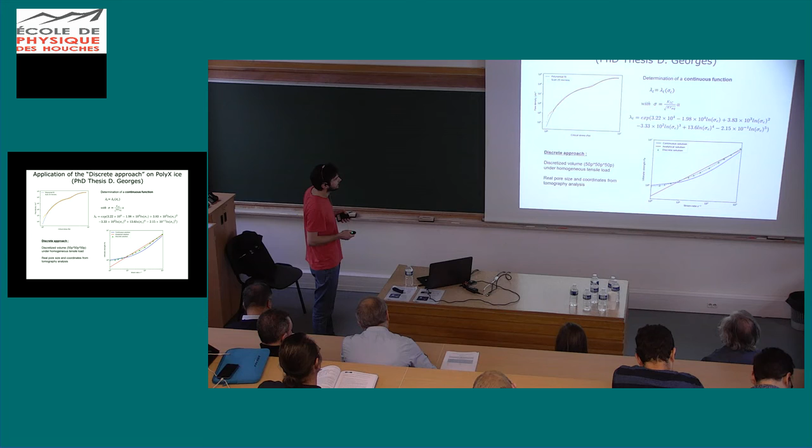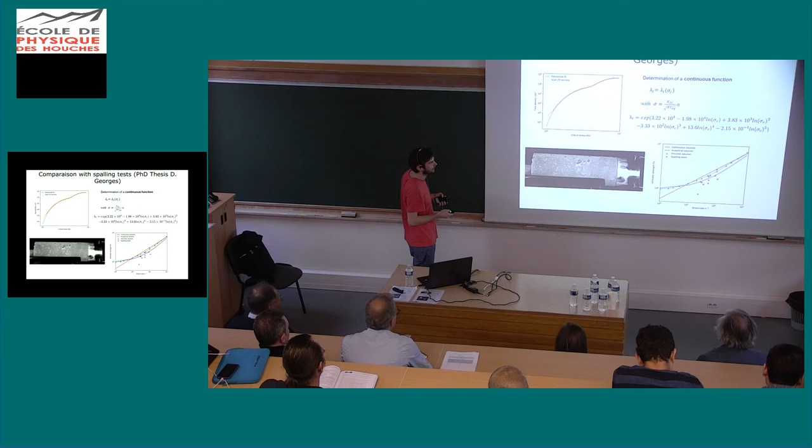We also performed the discrete approach. We loaded a discretized volume with a homogeneous tensile stress, using the real pore sizes and the real coordinates of their centers of mass. Here you can see the results in terms of ultimate strength for the discrete solution, fitting almost perfectly the continuous solution. We can also add the spalling test results I showed you yesterday, and we have an excellent agreement between these test results and the continuous solutions.

So, okay, now Maria is going to present the same method on ceramics.

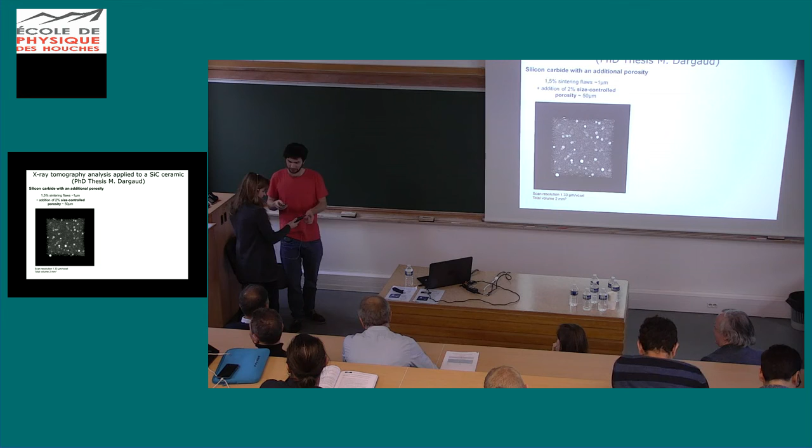Sorry for the noise. Okay, so you saw the concrete girl, you saw the ice guy.

So now for ceramics, what happens? So here you have the exact same material as the one that I spoke about yesterday. So it's a ceramic which has very small porosity coming from the sintering defects in between the different grains, and some larger porosity that has been added just to have a nice material to study. So we can do exactly the same as what the others presented.

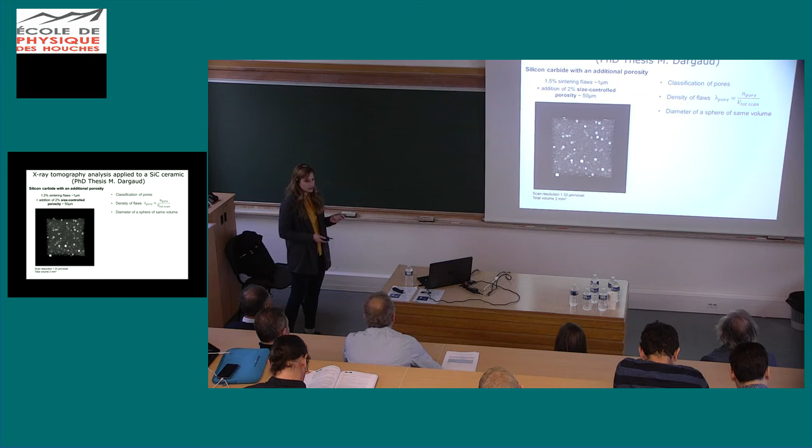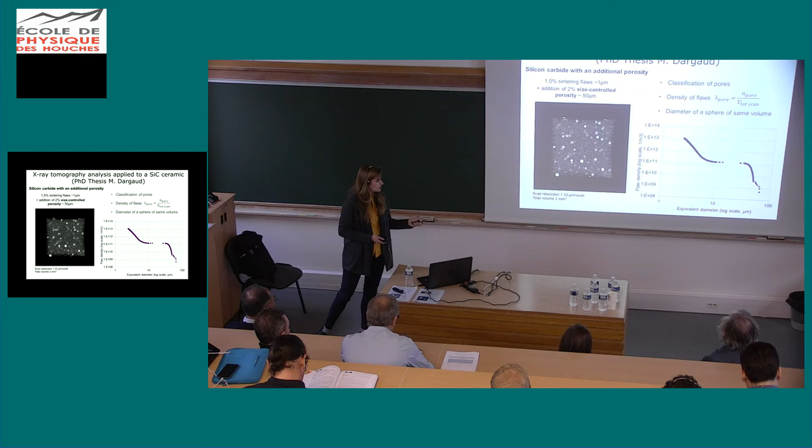So basically we extract from tomography this population of flaws, and by classifying them according to their volume and their number, we can actually reach this curve which shows the flaw density according to the diameter of the flaw. So here you see that we have mainly two different populations. We come back to the small pores here and the very large ones here.

And what I did is that instead of taking the assumption of Weibull law for this flaw population, I've actually tried to fit my flaw distribution coming from the tomography scan with some functions.

Well, no time for that, sorry.

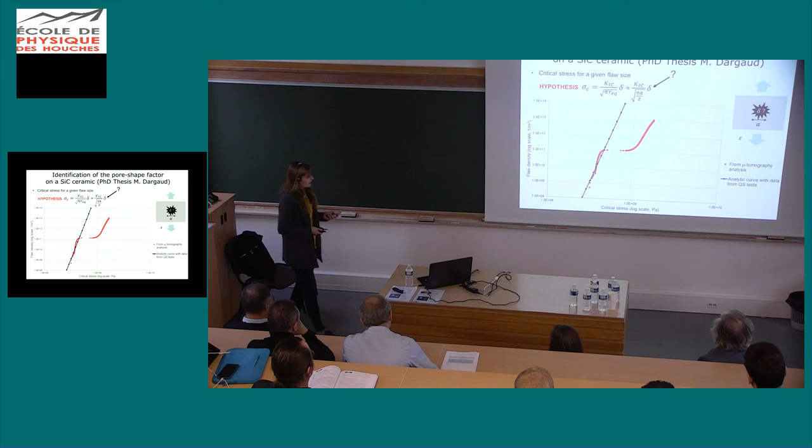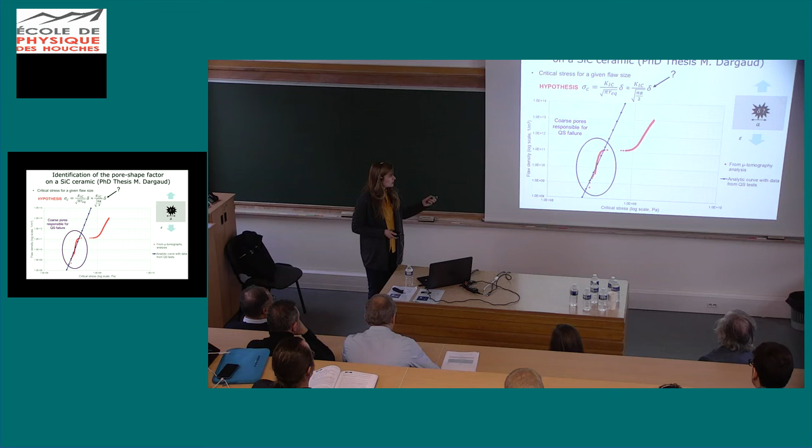The same way I've actually used the bending test and the tomography to fit this shape parameter linked to the geometry of the defect. Yeah, so the bending test here is fitting with the larger pores density, which are the pores activated during the bending test. So we have a good matching for a shape parameter which is very close to 1. Also for the same reason, the largest pores are very spherical.

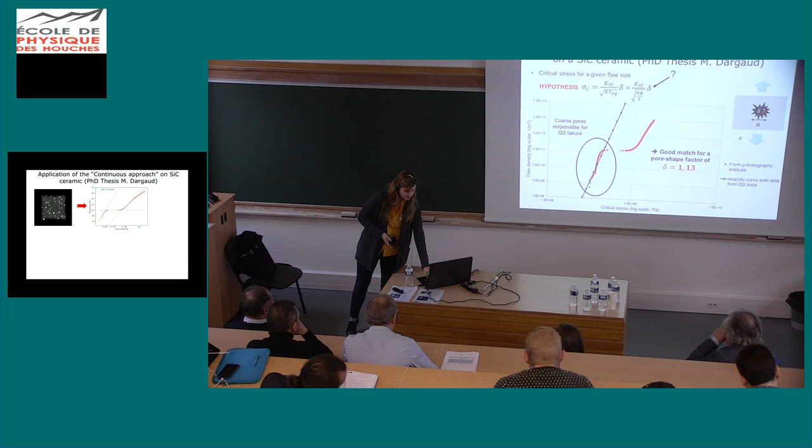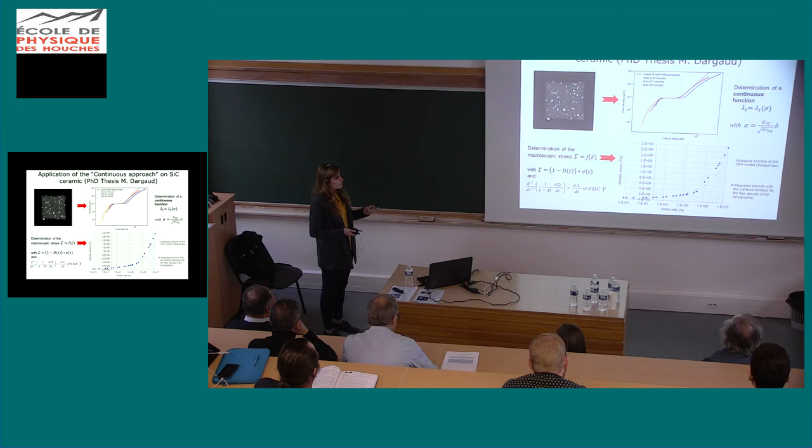So what we can actually do is from the tomography distribution of porosity, we can fit a polynomial law, and instead of having the assumption of the Weibull law in the DFH model, we use this continuous function and we implement it directly. So here you have 4 different strain rates. The ultimate stress coming from the DFH model, from the analytical solution, and in darker blue, you have the one coming from this continuous population of flaws.

Now the discrete approach, so these are the small images that the others showed, where at low strain rate only a few pores are activated. The video is not working anyway. So here at low strain rates, you would have just 1 or 2 pores activated. But when you increase the strain rate, you have multiple crack initiation.

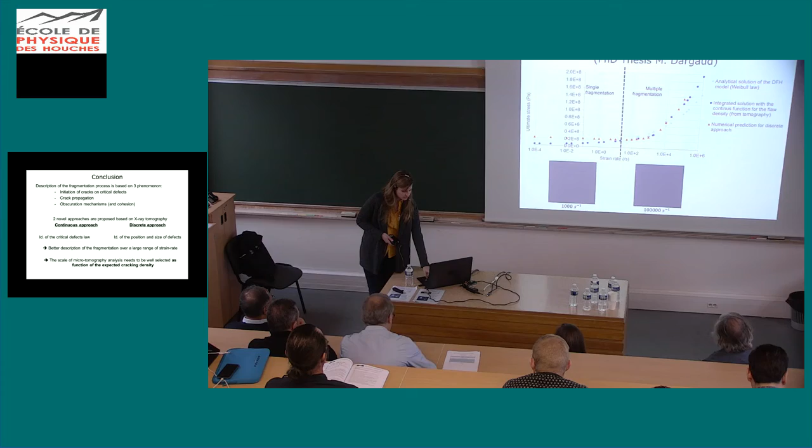So here you have the fits of the discrete approach, the continuous approach, and what is given by the analytical solution of the DFH model. And you have a very, very good fit. So here on the left side you have, let's say, a single fragmentation where you initiate only 1 crack. And on the right side you get this multiple intense fragmentation. So it's working very well for the 3 different materials. So this is the way to test this approach.

To conclude very briefly, you understand the potential of this approach using microtomography. It is really to be able to extend the analytical and numerical modeling to much higher strain rates, at strain rates where the defect population identified by bending test is no longer valid. And that's the real potential of this approach based on microtomography analysis. Okay, so we presented both approaches. I will just give you a few prospects as conclusion.

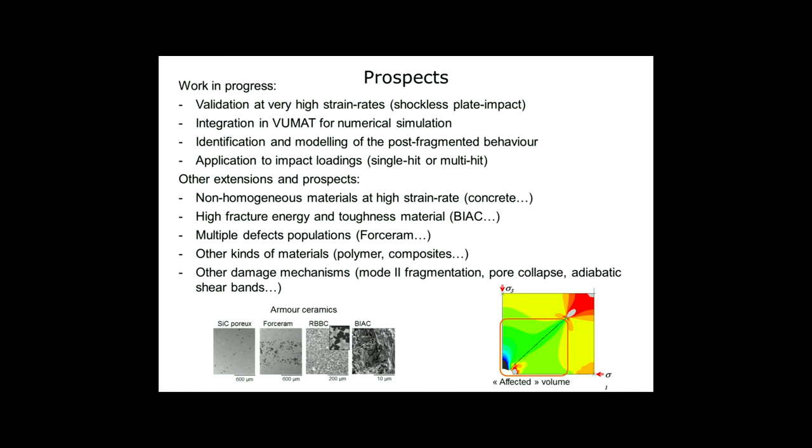As you understand, the work in progress concerns the very high strain rates, integration of this continuous law in a VUMAT subroutine to perform numerical simulations working at very high strain rate. Also to better identify and model the post-fragmented behavior, and to apply all these approaches to impact loading, single hits or multi-hits, for instance, for ceramic armor. And there are many other possible extensions and prospects. I could mention non-homogeneous materials at very high strain rate, higher fracture energy and tougher materials, like the ceramic that was presented by Yannick Duplan.

Also multiple defect populations, for instance the Forceram ceramic, where we had several kinds of porosity distribution in the sample. And we could probably also extend this approach to other types of materials and to other types of damage mechanisms. For instance, I talked about mode 2 fragmentation processes, but it could also be pore collapse, adiabatic shear bands, etc.

I think there is a big potential, and what we need for this modeling, you understand, is defects triggering cracks, or triggering a softening behavior, so that can be much more general than what we propose here, and a growth mechanism and an obscuration mechanism or affected zone mechanism.

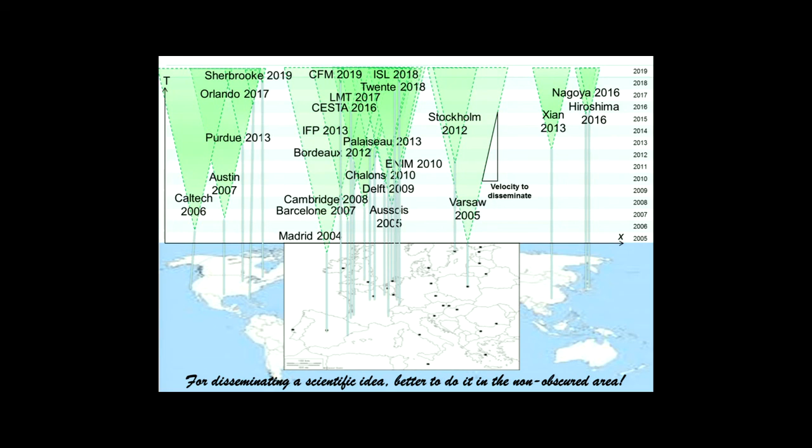Okay, so I thank you very much, and I give you another example of obscuration phenomena: all the scientific talks that were given to present the DFH model over the years. And I will conclude by saying that for disseminating a scientific idea well, it is better to do it in a non-obscured area. And the non-obscured area depends on the velocity of dissemination, on time, and on the number of seminars you can give in your life. Thank you very much.

Yeah. All right, we can have two quick questions. Thank you. And your colleagues.

Thank you. In your compression test, you told us that the propagation of the cracks is due to tensile stress. But don't you think that nucleation is driven by a mode 2 initial crack, by shear stress, and then propagation by tensile stress? In which case, pardon? Compression, uniaxial compression. Ah, uniaxial. Okay, uniaxial is